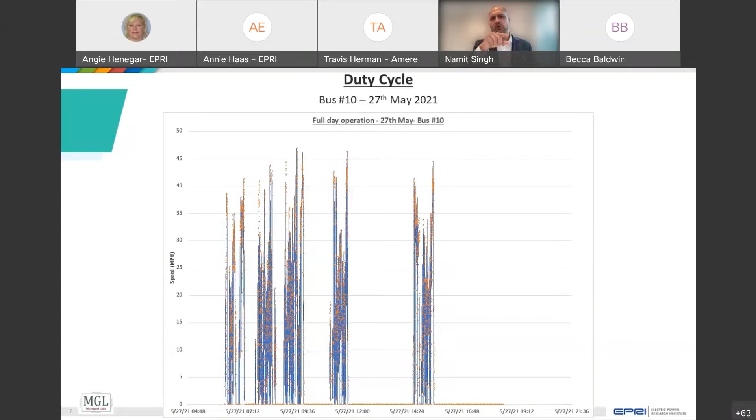Here is just a sample of one day's operation for one bus. On the x-axis is time and on the y-axis is speed - this is their duty cycle. We're able to track and sense how the fleet is operating on a per-second basis, or in some instances every 5 or 6 seconds, however the data logger is capturing the data. You can see we're able to observe how the vehicle is moving, braking, stopping, slowing down, and all of those things, because all this goes into the physics-based model.

Wherever the speed is 0, we know that for this much time the vehicle is parked somewhere, or when looking at charging infrastructure analysis, we do that type of analysis - if it's stopped or parked, where is it parked? So can we incorporate on-route charging infrastructure if need be. We try to get 1 second data, operational data for every single vehicle for the whole fleet, and that is the level of analysis we do.

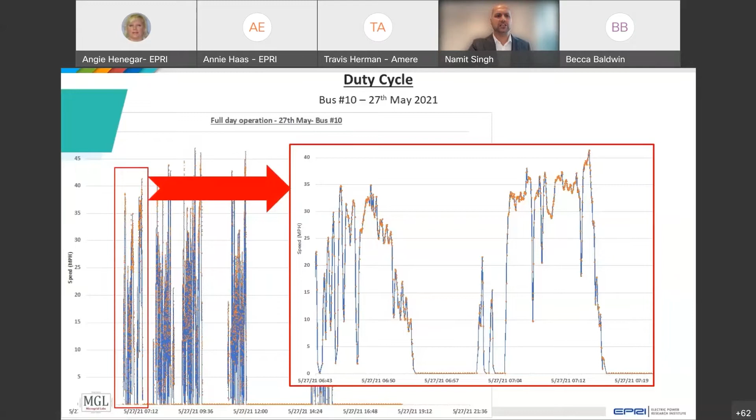The other way to look at it is that if you do not have loggers installed, we also have data loggers that we can provide and loan out in order to get short-term data to start this analysis. But in this case, luckily we had the fleet which had all the data available.

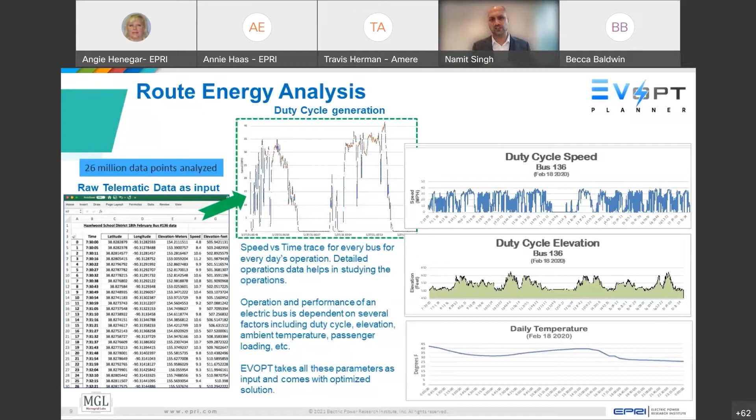With that duty cycle available, we plot it for every single day, every single route, because the way an electric vehicle operates is very sensitive to temperature and the terrain on which it operates. So we take all of this into consideration - on that particular day, how was the weather? Is it cold or hot weather? Do they need to turn on air conditioning, heating, and things like that? These are the level of details built into our software - all this data goes in as input, and based on that the software is able to do route modeling.

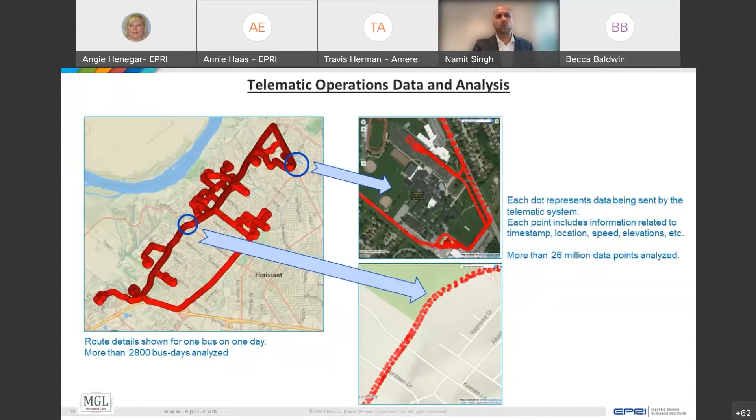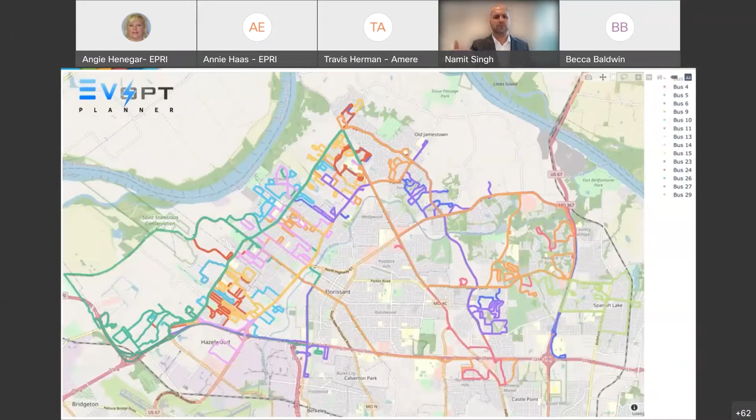Here is an example of the GPS trace, the every-second data I was talking about - this is what's available now. I'm showing on the graph for one bus, one route. This way we analyzed 2,800 bus days, and based on that we know exactly where each vehicle in the fleet is operating, so moving forward when we do charging location analysis we can look at a bigger picture. This is one day, one route, and in the same fashion we're able to get this layout for the whole fleet, for as much data as we have available. In this case we're looking at 1 month's worth of data, but if you have the whole year, we can identify exactly what is needed.

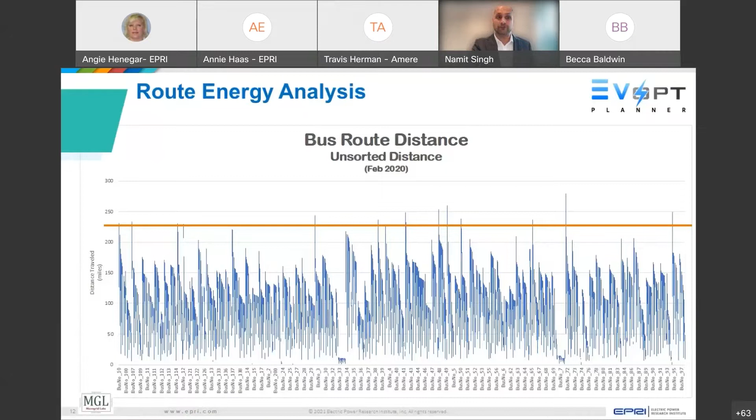So this is the type of output that we get, and then with that we start looking into the energy consumption—if we have to operate electric vehicles on this route, how will it operate? That gives us a good idea of, when you're looking at the whole fleet, what energy is required.

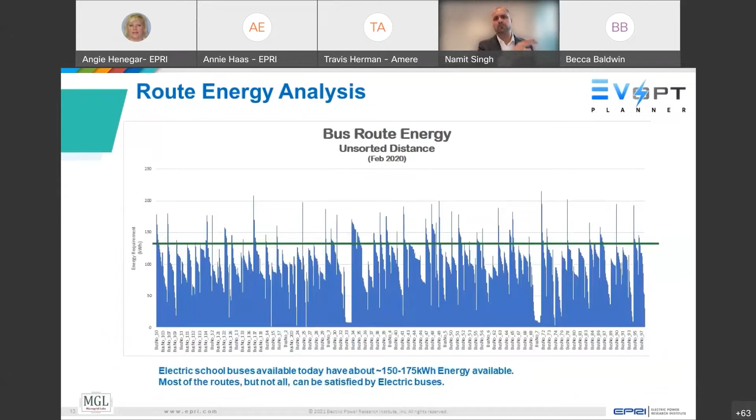So the same graph that I'm showing here, we structure it in such a way that we're able to see the question that comes up: is my fleet electrifiable? And if I electrify, then how much? Based on studying all the routes over the course of a month, we can see clearly.

For the electric school buses available in the market today, given their battery capacity, about 80% of the routes can be electrified and served today. So again, you're talking about a fleet of more than 120—they won't switch on day one, it will be gradual. But this gives them an idea: if I buy 10, 20, 50 electric buses, how many routes will I be able to serve?

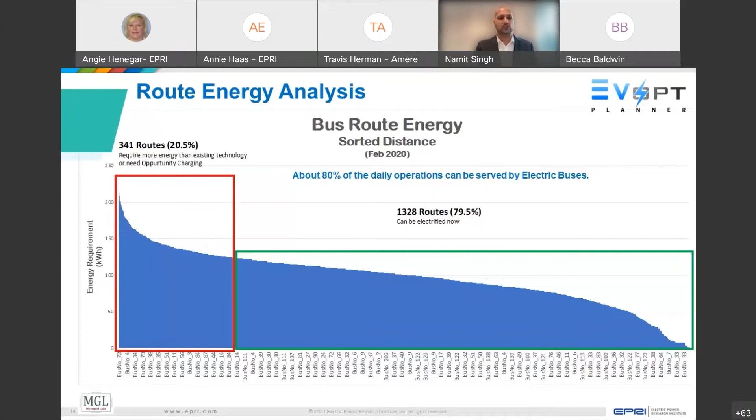So with that, this is the month of February from pre-COVID operations. We're able to identify and look into the worst day as far as energy consumption for the whole fleet. Out of that, we identify that.

So this would be the worst day of operation for an electric fleet, and we do a detailed analysis for every single vehicle that operates on that particular day. If you have a year's worth of data, we can analyze the whole thing, and based on that look at the worst case scenario, the 80% scenario, 75%, 50%, or whatever you may be interested in.

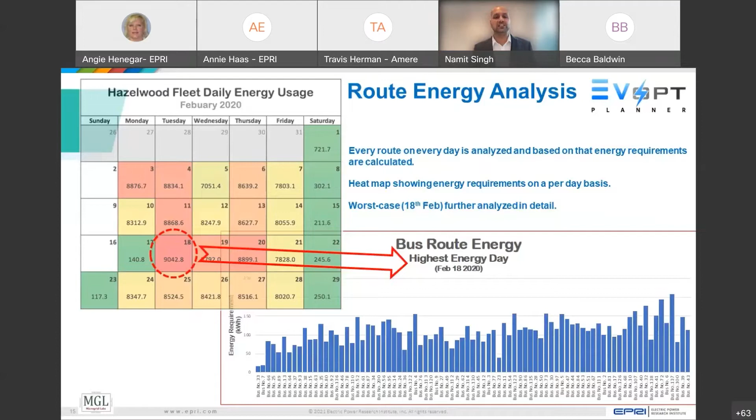But the idea is that this gives you data based on the input that is coming in—data based on which you can clearly understand how your fleet is operating, and make decisions accordingly. So with all of that being the first part, the route analysis, the next is the charging infrastructure analysis.

This is where phasing of the project also comes into picture. As I mentioned, with 120 buses, they're not going to electrify on day one—the idea is to do 10 or 15 first, then the next phase, then the next phase. So the example shown here is 15 buses.

So if you're doing 15-bus EV charging, what type of chargers are needed? How many chargers are needed? Will the existing transformer be able to support it? Do we need an upgrade on the transformer?

And then going upstream—if you change the transformer, can the medium voltage feeder, in this case a 13 kV feeder, support it? That's where, as Travis mentioned earlier, we had meetings with the Ameren distribution team to understand the load profile that particular feeder is supporting, and whether it will be able to support the load coming out of this case.

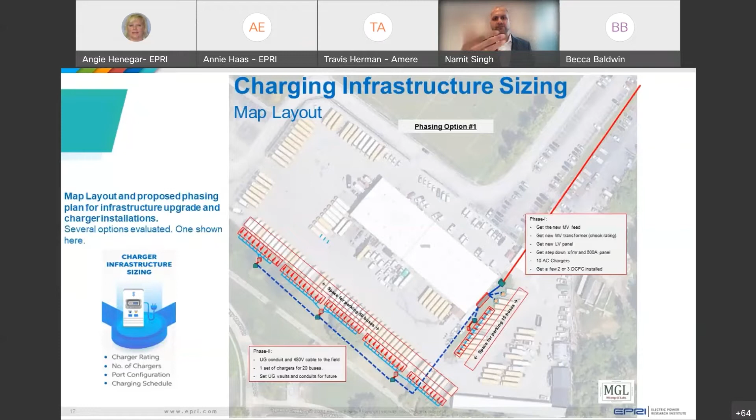So here we're talking about phase one, but moving forward in the same fashion we look at the next phase, adding another 50 buses. Just as an example, this is a full EV fleet—this is the end goal where the fleet is trying to get to.

We looked at multiple scenarios, multiple design options, multiple approaches—I'm just showcasing and discussing one here. But the idea is, in order to go through this, what would be the phasing or stepwise approach for your charging infrastructure purchase and construction?

Based on that, the electrical upgrades, and as I was saying earlier, what will be the impact on the medium voltage feeder? That's where we worked with Ameren to understand the load profile on the feeder—will it be able to support this now, 2 years from now, 5 years from now, 10 years from now? So that phasing is helpful for the fleet to make purchase decisions.

But at the same time, it's important for the utility to understand that, okay, they probably don't need to upgrade or change the transformer for the first phase of the project, for 10 buses.

But the moment you're talking about the next 30, that's when I need to upgrade and maybe potentially the feeder, when you talk about 120. I'm just talking about some examples here. But the idea is that this level of detailed study provides information for the fleet, for the utility, for anyone that is investing, or for these guys going out for grants and things like that.

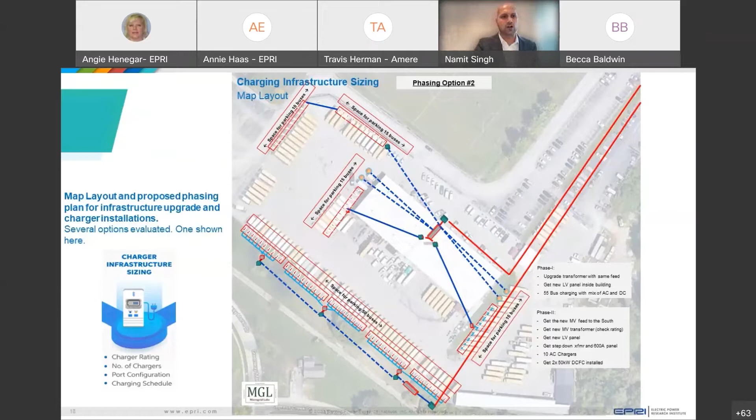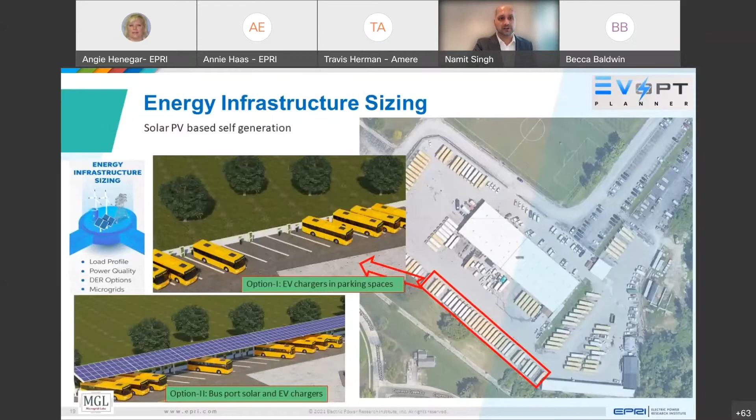So the other analysis we did was solar - can the fleet have on-site generation? Is the fleet interested in doing on-site generation? So looking at doing carport at all of these locations, understanding what the load profile or energy cost associated with that would be, and building based on it. Here is one model and example I'm showing, that if they're able to cover the whole parking lot and employee parking with bus port and carport solar, you're generating energy.

There are other benefits as well in some states and locations. I live in Colorado - unfortunately here, school buses cannot buy insurance against hail, so you have to come up with your own hail insurance or provision. So bus port or carport solar is perfect from that aspect as well, just as an example.

But the idea is that with all of these things, you're able to generate energy, store energy. Maybe the school district owns it, maybe the utility owns it - it doesn't matter who owns it and operates it, but the idea is that here is a consumer with high energy and power demand, so you can have on-site generation and space available for that.

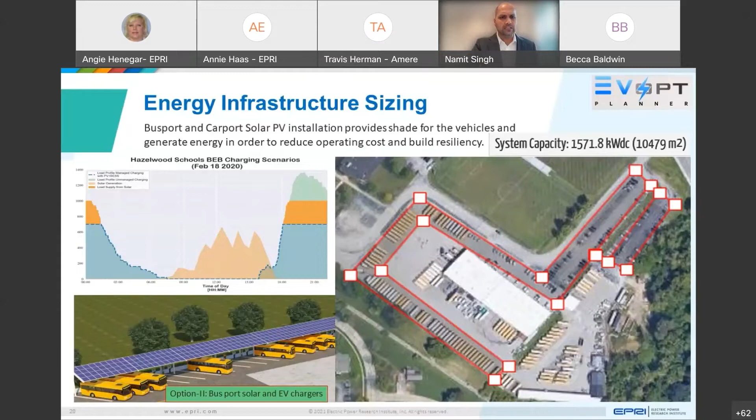So in this graph, let me go to the next slide - that's where we are, okay, I'll come back to that later. But here is one level or one scenario we're discussing, that they install 100 15 kilowatt AC chargers. So if that's the scenario, what is the load profile associated with it? What is the upgrade cost associated with it? What is the phasing associated with that? So that level of detail we go into here.

And again, this is where working closely with the utility and understanding what they're looking at comes in, and how the project can support the utility as well. So here we analyze that whatever load profile you have throughout the course of a year, can the feeder support that during summer months when the air conditioning load is really high? The use case here is good - school buses do not operate at full capacity, or do not operate at all in some cases, during summer. That means you don't need charging, so you can design based on that.

But the flip side of it is, what about vehicle to grid? Everyone is talking about V2G as well. So if you want to use this fleet to support that particular feeder, then the design completely changes - then you're not talking about just AC chargers, you'd have DC chargers, your cable capacities, your feeder capacities locally here supporting the chargers. So the sizing of all of that changes - the infrastructure completely changes just to support that particular use case.

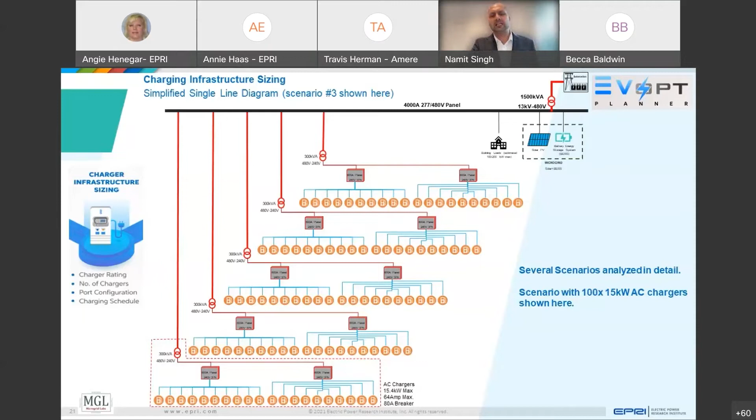That is what was discussed. And then the idea was, if yes, then for this battery, what power do you need? Do you need 1 hour support, 4 hour support, 10 hour support, whatever it may be? But anyways, that is the level of detail we went into when discussing the charging infrastructure and looking at all these different scenarios.

Namit, sorry to interrupt, but there's two questions in the chat that may feed into what you were just talking about. One is about whether the tool helps prescribe or recommend which EV model to buy in addition to the battery. And the second, on utility upstream impacts, are you assuming circuit optimization or simply the total demand from each charger added together?

I'll answer the second question in upcoming slides, because we talk about what we've done on that aspect. But the first, actually it's the other way around.

So for the vehicle model, we are building these vehicle models as they are being released in the industry. Right now we're focused on medium and heavy duty, as I said. So this use case is talking about school buses, and there are 3 or 4 manufacturers, each having multiple models of battery size available.

The way we're doing it is we're creating digital models of each one, as close as possible with a physics-based model into the software, so that whoever is operating, using, running it can go through a drop-down menu and select how it will perform on their route. But for that we need very detailed inputs coming in from the OEMs as well.

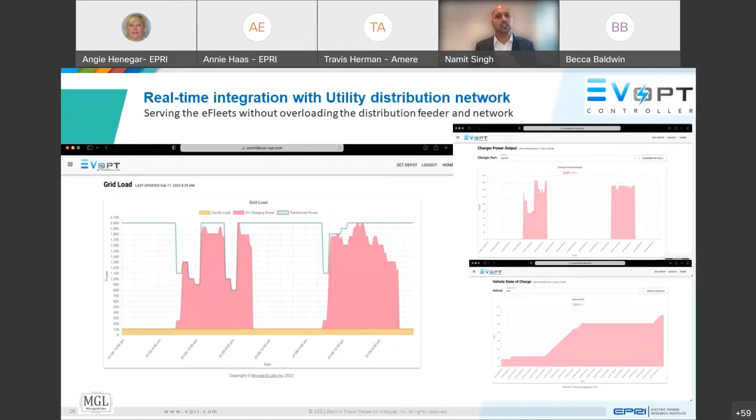This corresponds to the top right, which shows what's going on the charger side and the vehicle side. Again, we're looking at it at a system level and able to interact with the grid in real time, work with the grid to make decisions - not just peak load shaving, but shaping to what the utility needs and requires on their side.

We've partnered with Itron, because Itron is one of the leaders in distribution network related hardware and software. We've completed our first integration with them, so Itron is able to provide all the information on the distribution network side, and we're able to provide information and control everything behind the meter. Jointly, we're implementing this solution - we've finished our integration with Itron.

The idea is that if your utility is already working with Itron, we can move forward faster. At the same time, we'd like to work with utilities to tie in so that we can support you in real-time operations as well.

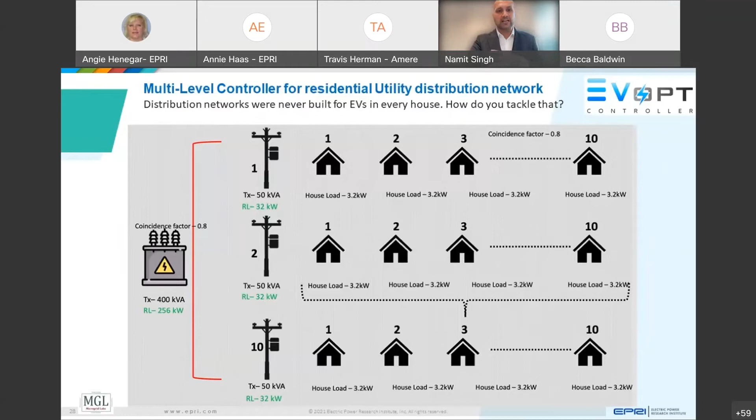The other aspect, a little different, which I'll talk about quickly, is a multi-level controller that comes into picture for the residential level. The approach and software architecture are different, but the idea is that as we move forward and get more EVs added at the residential level, this controller comes in and is able to support the grid as well.

So the moment all the houses start getting EVs, your distribution transformer will basically overload, hence moving forward on the other level as well. But the idea is to be able to control it and provide that at the residential or the lowest at the charger level. So that's another aspect we're working on.

So quickly, as a company, we are a startup. We started this program at that time and started looking for funding as well. Just this December, we closed our first round of funding with Innosphere Ventures locally here in Colorado, and Catalyze and Jacobs as our strategic partners, with Catalyze on the solar and storage side, and Jacobs, one of the largest engineering companies around the world.

With this team, we're now able to support the industry in providing a turnkey solution, where MGL and the technology we've built does the upfront work, and Jacobs and Catalyze, with their expertise and experience, come in and help us implement the project, operate the project, and bring in funding as well. So a very strategic partnership, and we're very excited for this opportunity to partner with everyone and support the industry from start to end.